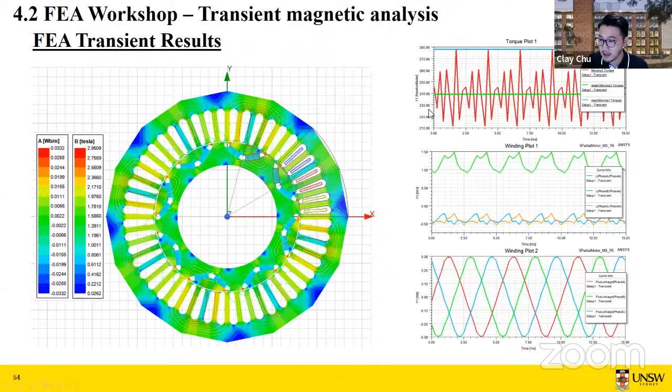Most importantly, we built this complete FEA model of the Prius motor, and we got its Ld, Lq, and flux linkage, right? And from yesterday's tutorial, we learned that in Simulink, the motor model is actually just the equivalent circuit, the torque equation, and the motor motion equations. So if you want to do drive of a PMSM, you need to at least know its pole pairs, the magnet flux linkage, Ld, Lq. And we also need to know its inertia, the damping ratio, and the friction.

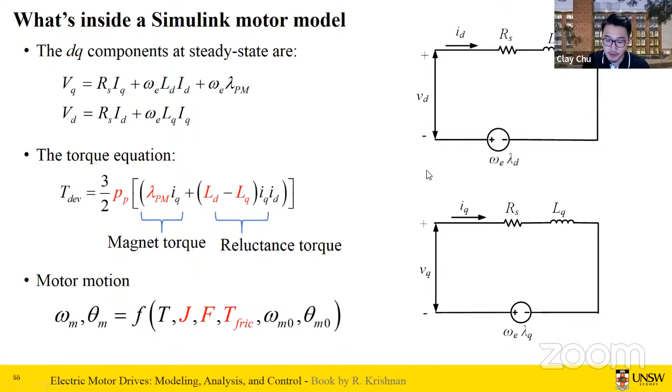If you have a prototype, a real machine, you can definitely measure these values. But in reality, most of the time when you just start to design an electric machine, you don't have the prototype. We only have the FEA model. So you can build the FEA model, get these fundamental parameters, and then work on the drive. So your project can go in parallel: one team works on the motor design, another team works on the motor drive. This is the advantage of using FEA in motor drive and motor design.

In yesterday's tutorial and lecture, we learned the FOC drive, how to implement field-oriented control on an IPMSM. So this is the control block diagram. In such a control, we want to control the speed of a particular IPMSM. So we give it a speed reference, and from the encoder we know the real-time speed of the machine. Then we get the speed error and process it with the speed PI controller. The output can be either torque reference or Iq reference.

Then based on the output of the speed controller and the real-time speed, we need to decide which control trajectory we want to follow: MTPA, maximum torque per ampere, flux weakening, or maximum torque per volt. So how do we know which trajectory to select? Professor Datta introduced this in her lecture. We need to calculate the base speed, the crossover speed, and the critical speed of that machine. The equations were provided in the lecture.

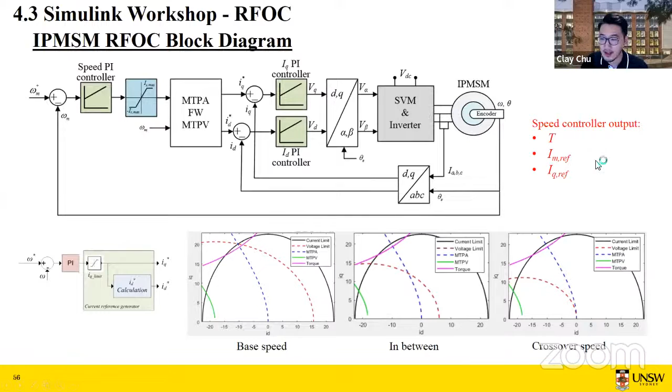In our inverter, we have 6 switches. We need to use SVPWM to generate the duty cycle for each switch. And this part of knowledge is also covered in Professor Datta's lecture. All right. So this is a brief review of the FOC control.

Another knowledge point I want to emphasize to you is that when we see FOC control, we are actually referring to this part of the control from ID and IQ. So this is the FOC control, meaning we are using ID and IQ to control the field, the torque, and the speed of the machine. The first part is the speed controller. No matter what control method you're using, you need the speed controller, okay?

So see, for this one, Professor Datta introduced the direct torque control. For this one, we also need the speed controller. After that, we use the torque and the flux to control the machine and the inverter to generate the duty cycle, the gate signal of each of the switches in the inverter. So this is DTFC control.

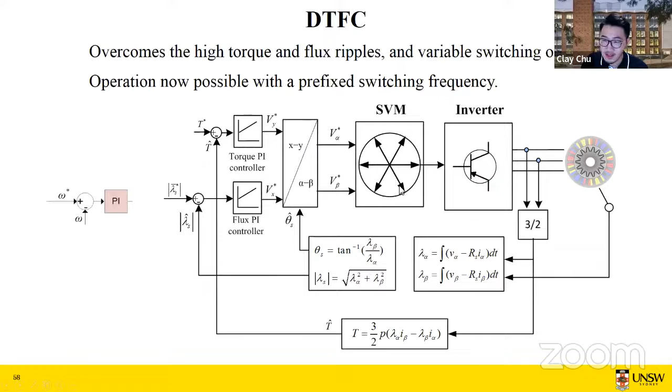All right. Now, let's go to the Simulink model. I have uploaded this model to the shared Google Drive, so you may download it to your own computer and explore. I hope you have tried using this model. This is the most basic and fundamental, and you can say the most classical FOC control. I did my best to make it look neat, and you can see all the parameters are properly named, so you can know what's inside each of these blocks.

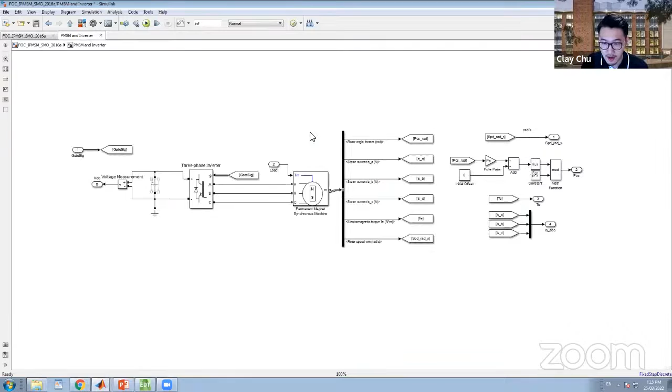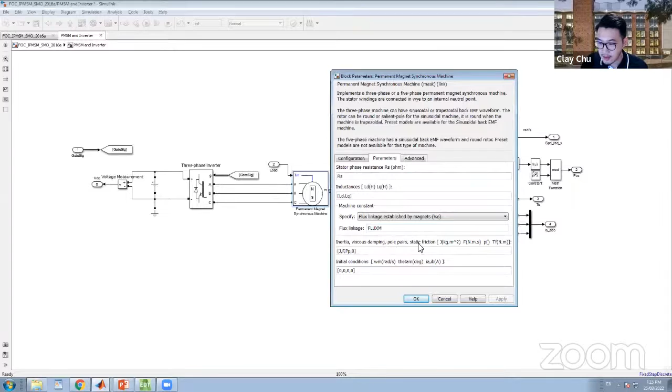Yesterday we introduced how we construct the hardware part. We have this 3-phase inverter, we have this PMSM, and inside it is actually the DQ equivalent circuit, the torque equation, and the motion equations. To build this, you need LD, LQ, RS, flux linkage, and the mechanical parameters. The input of this block is just the gate signal, the duty cycles. The output is 3-phase current, DC voltage, and encoder position.

We don't always know the torque of the machine, but we can estimate it using the parameters and IA, IB, IC. After IA, IB, IC, we need to transform them to ID and IQ. And a very important part is to decouple ID and IQ. So why do we need to do the decoupling? Do you still remember? This is also provided in Professor Datta's lecture. We want to decouple IQ in VD and ID in VQ to make the current controller faster.

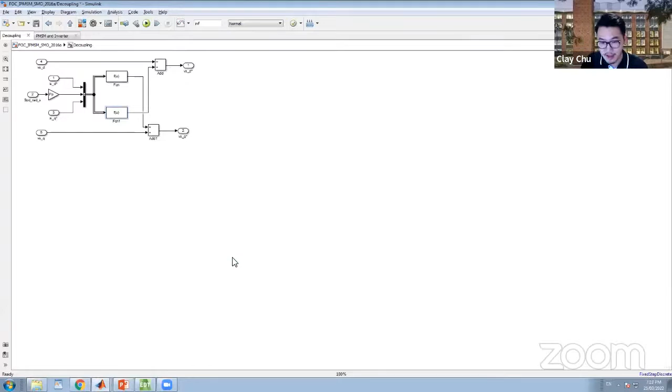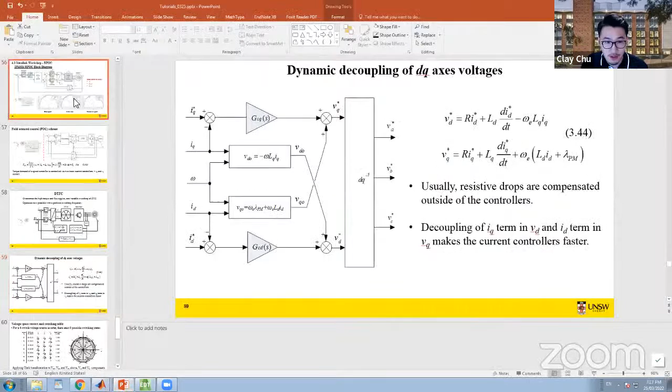So this is the diagram and the equation. If you open our Simulink model, you will see the same equations. This is built exactly as the block diagram and the equation indicate. After we do the decoupling, we have VSD and VSQ to be used in the control. So let's talk a little bit about the control. You can compare the Simulink control model with our control diagram shown here. Again, they are the same.

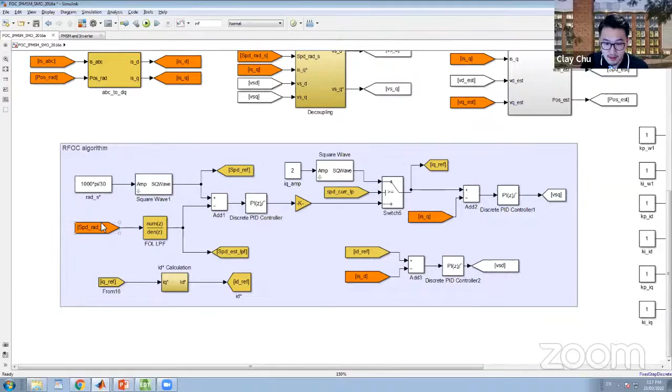At the beginning, we have our reference speed. For example, in this case, we want the machine to operate at 1000 RPM. And this is the speed measured from the electric machine. We get the speed error, and it passes through the first PI controller, which is the speed controller. The output of this PI controller can be either torque or IM or IQ. In this case, we are using the speed controller to generate the IQ reference.

Then using the IQ reference, and in this model, we assume the machine only operates in the MTPA region, okay? So this is where you use the equation for MTPA to calculate the ID reference. So this is how we get the ID reference, okay?

And after we get the ID and IQ references, we need to apply them in the next two current PI controllers, so this one and this one. And then we can get our VSD and VSQ. So actually the decoupling should be after the control. So we get VSD and VSQ, we do the decoupling, and we get the decoupled VSD and VSQ, okay?

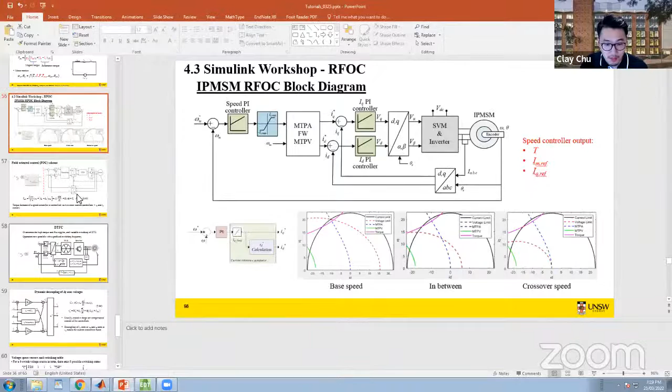And after we get the VSD, VSQ, we go to the SVPWM generator. I hope you still remember what's inside the SVPWM generator. So for an inverter with 6 switches, we can have 8 combinations, and then we can draw them in this vector plot. So a full circle, 360 degrees, means 1 full electric period. So we need to operate the 6 switches to generate a circle.

Because a circle in the alpha beta reference frame is a sinusoidal wave in the time frame, which is the voltage varying with the time. And based on the theta angle in the alpha beta reference frame, we can decide which sector the motor is currently operating in, and in each sector, which switches we need to control, okay?

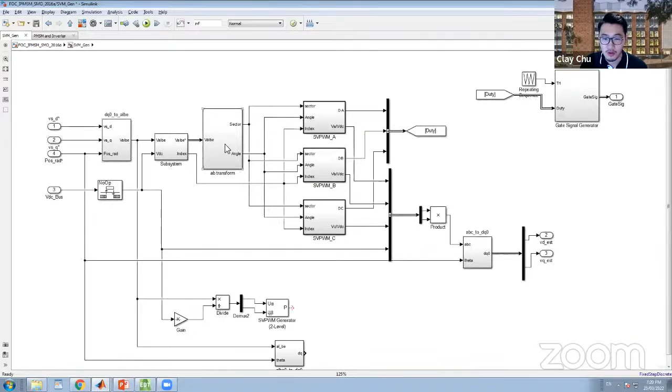And if you go to this block, you will see the same thing. So we get VSD and VSQ, and we do the alpha beta transformation to get V alpha, V beta, and then from that, we calculate the vector number and the angle. Then using the vector number and the angle, we decide which switch we need to turn on, which switch we need to turn off, and what is the duty cycle. There is a matrix for you to calculate the duty cycle for each switch for each different sector and vector angle.

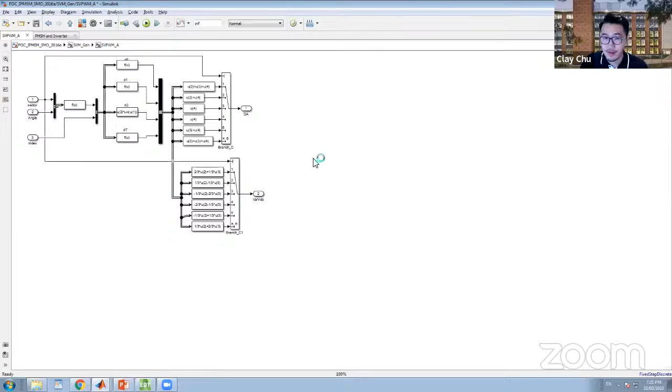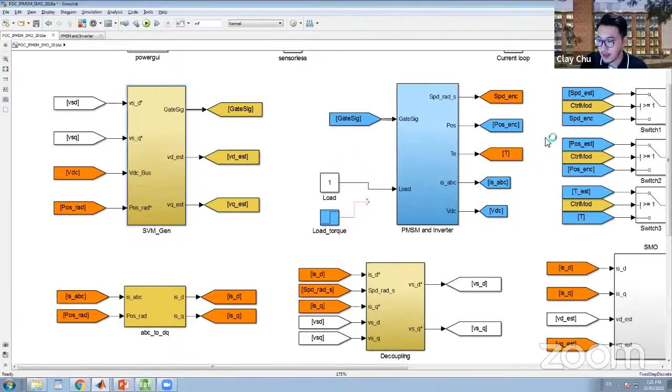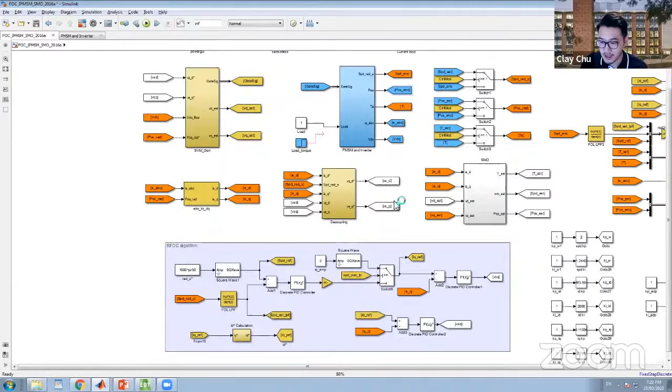Okay, so this is how we build the SVPWM generator, and the output will be duty cycles, duty cycle for each switch. And the duty cycle for each switch will just go directly to the inverter, and that controls the PMSM. And in the next control cycle, we will get the new IA, IB, IC, VDC, and rotor position. And we just repeat this control cycle, and then we can complete the FOC control. Okay, now let's look at the result.

Compiling, open the diagram. Okay, so we are controlling the machine to accelerate from 0 to 1000 RPM. So you can see this is how ID follows the ID reference. How ID follows the ID reference is controlled by the ID PI controller. And this is controlled by the IQ PI controller.

Okay, this is the speed. The orange one is the speed reference. The blue one is the encoder measured motor speed. The yellow one is actually the speed estimated by the sliding mode observer. We won't talk about the SMO, but it is built inside this model for you to explore.

Okay, and Professor Dutta has covered SMO, but at the basic level. So this part of knowledge is for you to explore in your own time. And if you have any question, you can send me an email. We can discuss it.

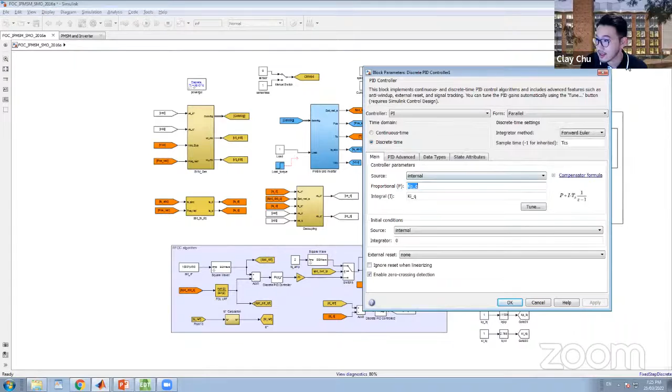But before I go to that, do you have any question about the Simulink model? Has anyone tried using it? Do you have any question about it? Nope. Okay, that's all right.

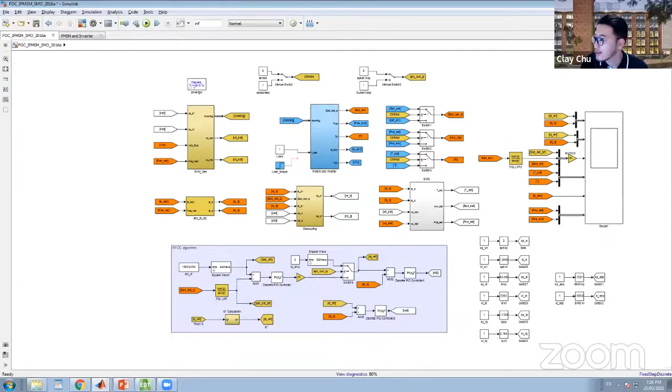Now let's see how we should tune the PI controllers. Oh, sorry. So the most widely used and classic method to tune a PI controller is called the pole placement method. I won't go too deep into the theory, the control theory, the transfer function, the plant model of the pole placement method, because we are engineers, so you don't have to understand it. It is good if you can understand it, but the most important thing is you need to know how to use it. So in this tutorial, I will only briefly introduce the theory, and most importantly how we should use this pole placement method to calculate KP and KI.

In this case, we are using the ID and IQ controller as an example. So first let's see the theory of pole placement. Basically, for every control system, you need to know its transfer function. You can also call it the plant model. And because we are trying to build this model in Simulink, and Simulink is discrete, we need to discretize the plant model, right? So after we build the transfer function, we discretize the plant model.

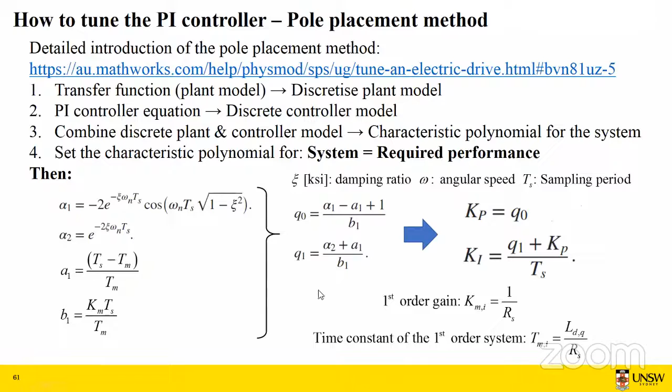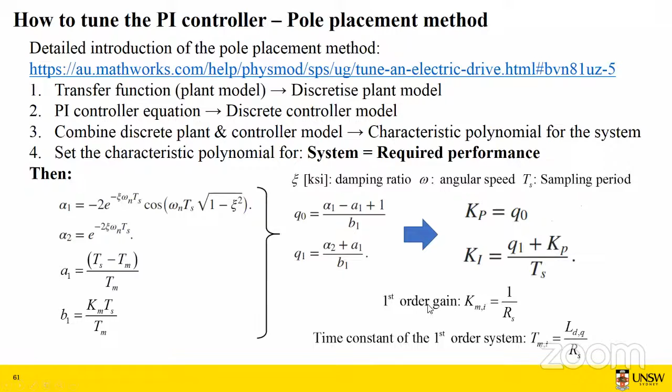In the Google Drive I shared with you, in the MATLAB file, you will find the MATLAB code applying these equations to calculate KP and KI for the ID and IQ controller of the Prius IPMSM motor. They are exactly the same. I can probably show you the code.

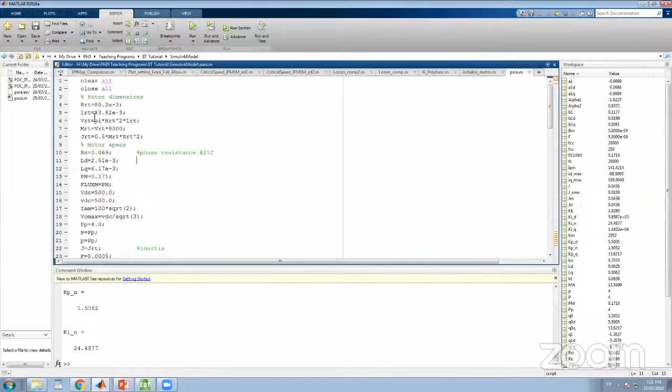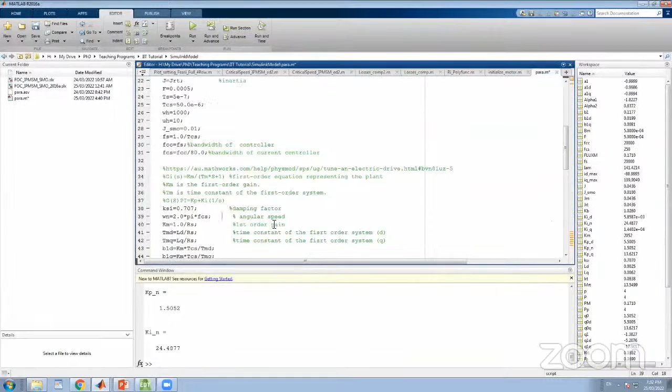So if you can see this, it's probably a bit small. Okay. So it starts from here. This ksi is the damping ratio. Omega n is the electric angular speed. Actually, I should not say it's electric angular speed, because it is 2 pi f. F is the bandwidth of the current controller. Okay, it is actually the control frequency.

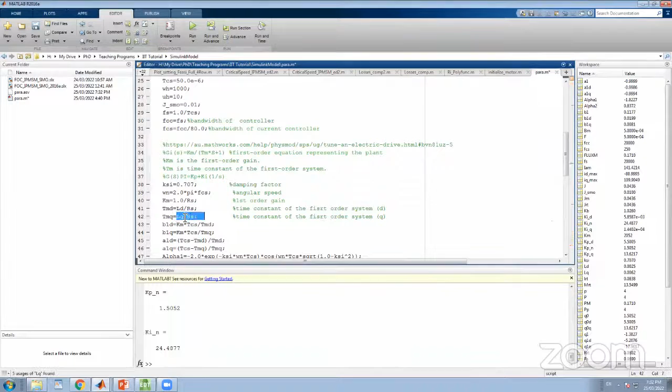Then Km is our first order gain. Tm is the time constant of the first order system. For the ID controller, it is LD divided by RS. For the IQ controller, it is LQ divided by RS. And these are the equations to calculate B1 and A1, alpha 1, alpha 2, Q0, Q1. And this is the equation to get the KP coefficient and KI coefficient: the value of KP and KI for the ID controller, and the value of KP and KI for the IQ controller.

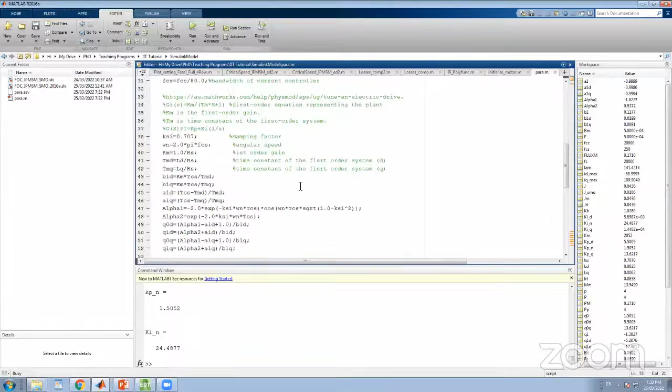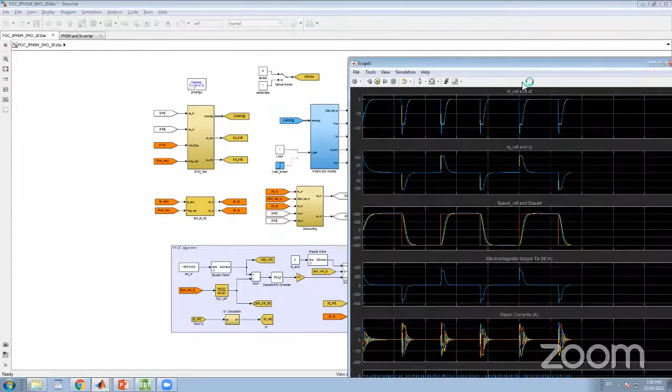And if you see here, the KID and KPD, which is the KP and KI for the ID controller, made the ID follow the ID reference very well, right? And also we have IQ following the IQ reference very well. So this is how you use the pole placement method to calculate the KP and KI to be applied in your current controllers.

Okay, so up to here, do you have any questions about this? This is the very classic method to tune the PI controller. Classic, but useful. No? Okay.

We don't have any questions, so let's try using this model and try changing the load condition, and let's see how the motor will respond to a load change. So in this case, let's give the motor a constant speed reference and let's run the model.

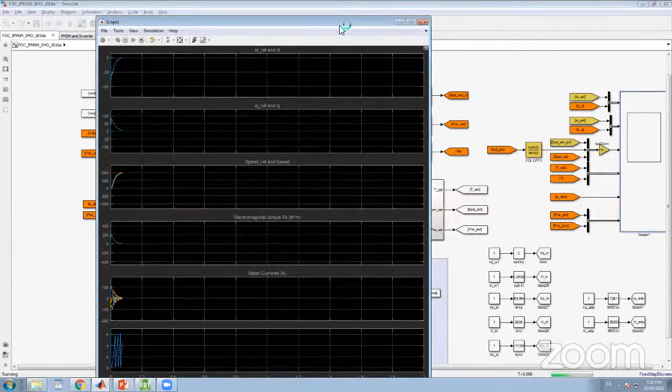Okay, so you can see now ID is following the ID reference, IQ is following the IQ reference, speed increasing from 0 to 1000. And when it reaches the designated speed, our torque will gradually drop to very close to 0. So this is the place where we change the load we apply to the PMSM model.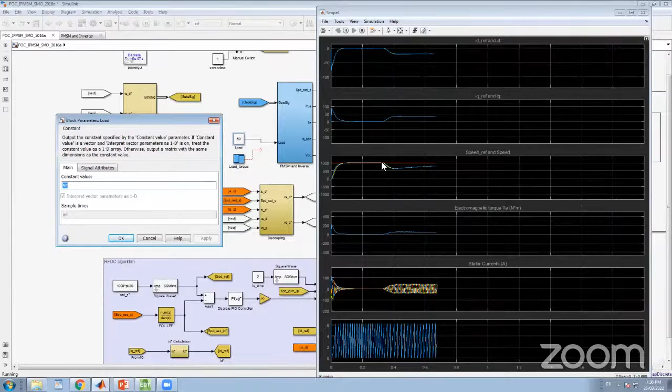So after we apply an additional load, you can see the speed dropped, because we applied an additional load. And now the controller is trying to get a higher current amplitude to increase the torque to compensate for the mechanical load we added to the machine. So there will be a sudden speed drop and then the speed will gradually go up to the reference value.

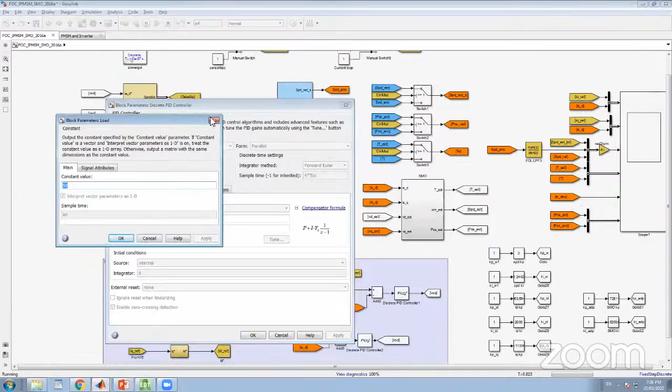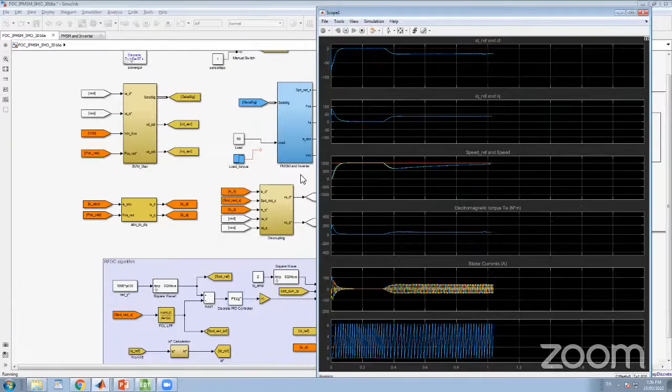If you think it is increasing too slowly, then you need to tune the speed controller. Oh, not here. So we can increase KP and KI to make the machine go back to the steady state faster. Okay. Now let's try increasing the load again.

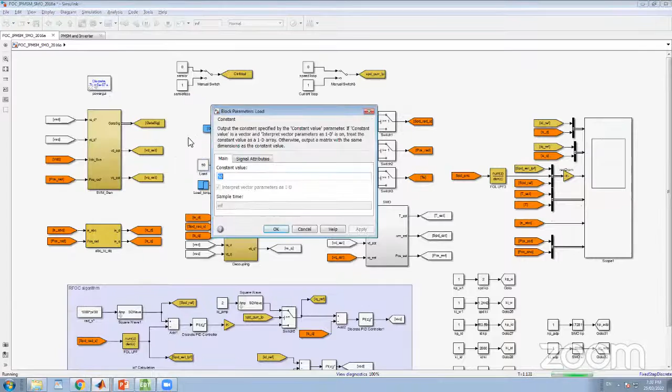So after we further increase the load, the current also increases. The speed drops again, and then the controller is trying to get a higher current, higher torque, to accelerate the machine back to the speed reference.

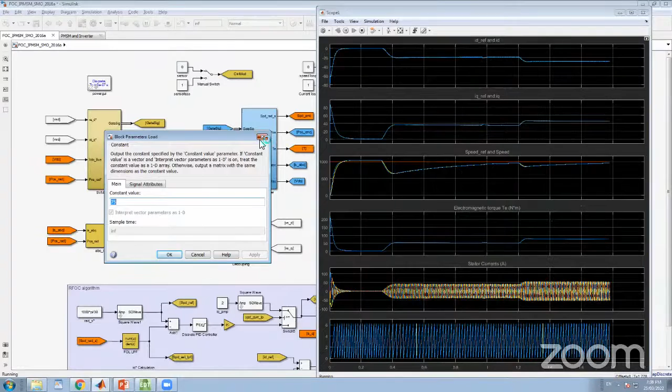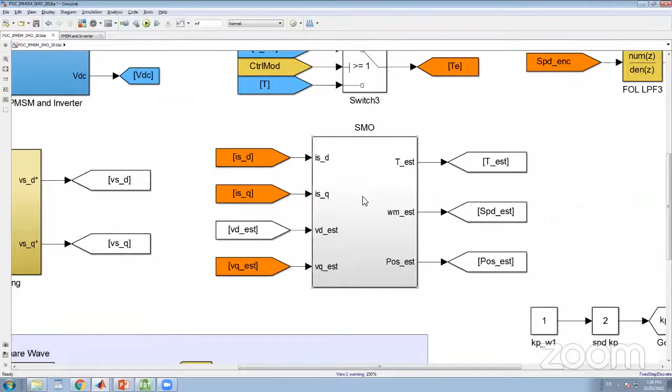Like I said, this model is also built with the sliding mode observer. This is the sensorless position estimation algorithm. Professor Dutta has covered the basic knowledge about SMO. You can explore this block later in your own time, and you can also switch to sensorless using SMO. Just click here, and it will switch to the SMO controller. So this is basically what's built inside this model.

And yeah, do you have any questions about the Simulink model using field-oriented control? Nope. Okay.

If there's no question about field-oriented control, then let's go to the last part, about optimization. So how should we do machine optimization using optimization algorithms? All right. So the two most commonly used multi-objective optimization algorithms are the particle swarm algorithm and the genetic algorithm. Professor Dutta has introduced both algorithms in her lecture, but let's go through them together with more technical details.

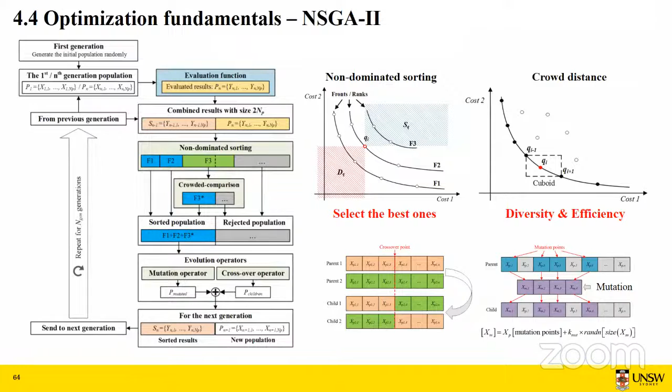From the Pareto front. So this is basically how the algorithm works, okay? Do you have any question about this part? Any question about the non-dominated sorting or the crowding distance? Or if you have any question about the previous step, please let me know. Do you have any question about the genetic algorithm? No?

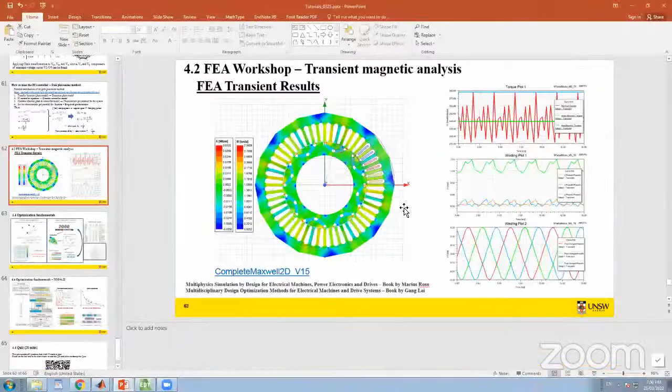Okay, then if you don't have questions about that, I want to show you a few other functions of the, oh, my Ansys is frozen. I can't open it. All right. Okay. Let me close it and reopen it to show you some results of FEA. Okay.

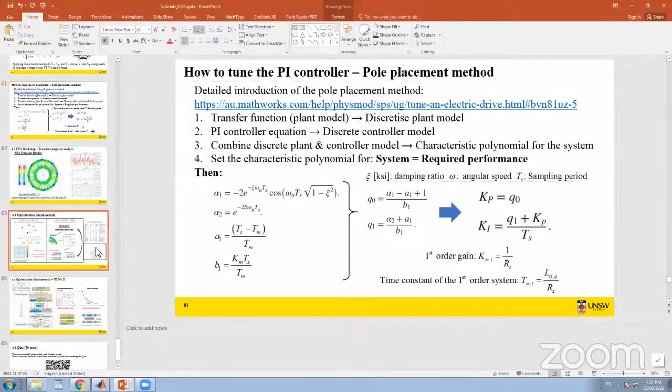Okay, so please give me a few minutes to solve the technical problem. In the meantime, if you have any question, you can organize your question and send it through the chat window, and I will help you to solve it. Any question about the pole placement method to tune the PI controller or the optimization algorithm, please let me know. Okay, so let me solve the technical problem. I'm sorry for that.

Okay, I got one question asking which type of method you have adopted for tuning the algorithm parameters. Okay, so which algorithm parameter are you referring to? Sorry, I can't hear you clearly. Do you want me to open the Simulink or the PowerPoint to answer your question? So is it a parameter in the Simulink model, or is it a parameter in the optimization algorithm?

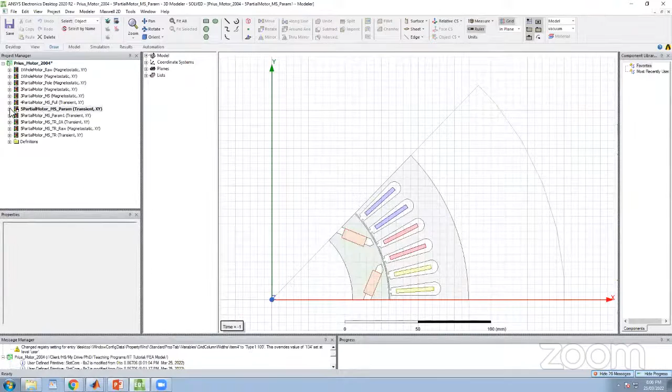Is there some issue? I tried to open it. I don't know. For other participants, are you able to open it? Shatish? Okay. It's saying it's not accepting the responses. So I think that is not activated. Please look into that. Okay, let me try to solve it. Yeah, please. Share. Now it's okay. Dr. Lei, it's fine now. Okay, yeah, that's good. Thank you.

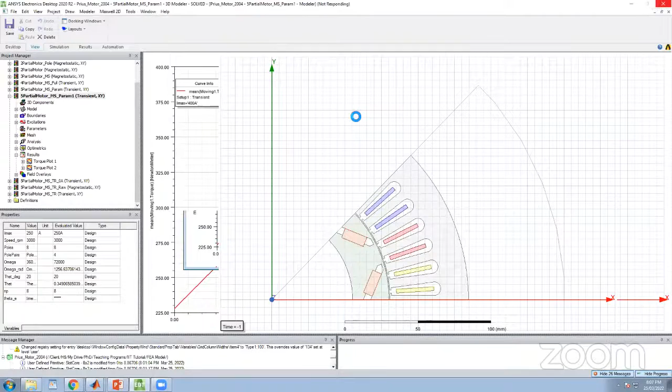Okay, now I finally got the software open, and sorry for that technical problem. The thing I want to show you is parametric analysis. How do we do a parametric analysis using ANSYS, or any other FE software? Previously we solved this transient model for a fixed theta angle. Theta angle is the angle between the current vector and the Q axis, right?

If you remember what we learned from the lecture, the MTPA, the theory of field-oriented control, is that we can use the current amplitude and also the current angle to control the magnet flux, the flux linkage, and also the torque. And for the IPMSM machine, let me draw it here. For the IPMSM machine, normally we have both the magnetic torque and also the reluctance torque.

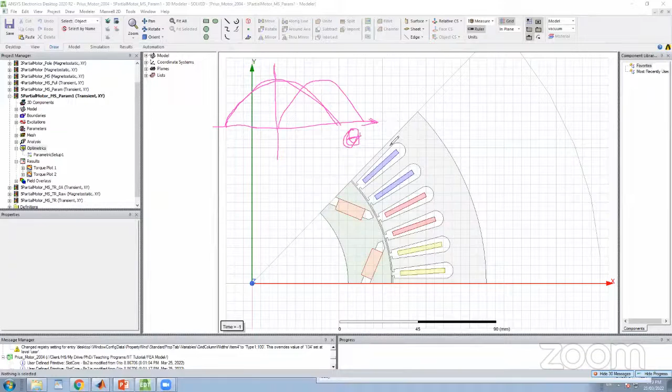The x-axis is the value of our theta angle. Or you can also represent it using the Greek letter gamma. So for the IPMSM machine, we don't always have the maximum torque when gamma equals 0 degrees, right? Sometimes we have a higher total torque. Let me change the color. If we sum the magnetic torque and the reluctance torque together, we get a new total torque curve like this.

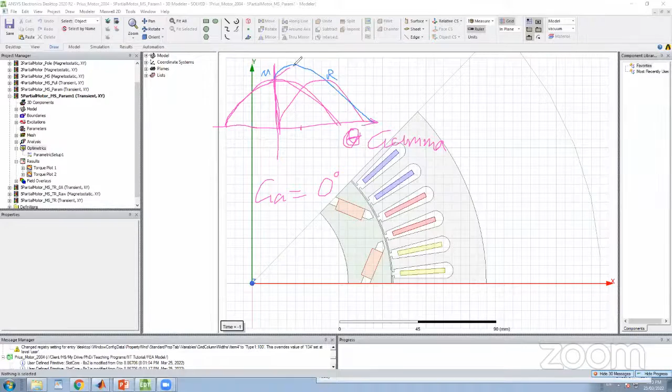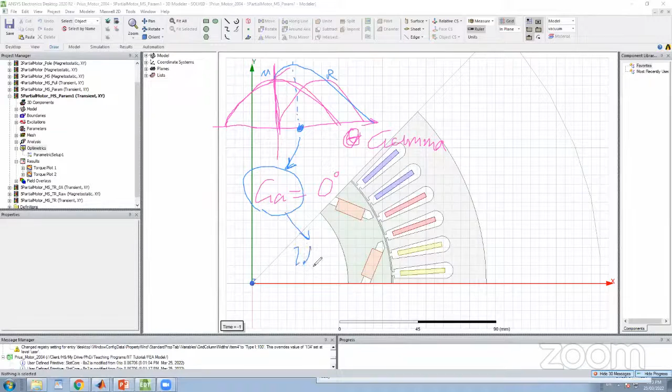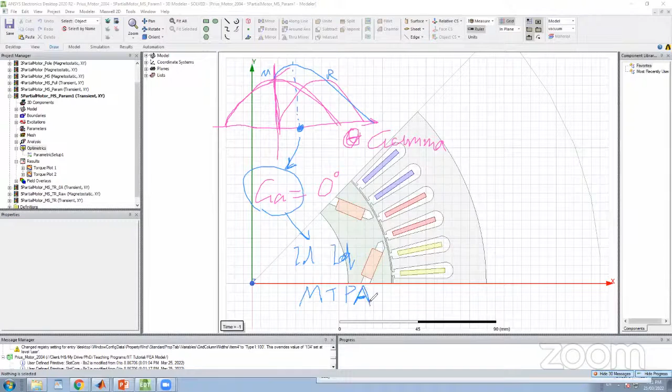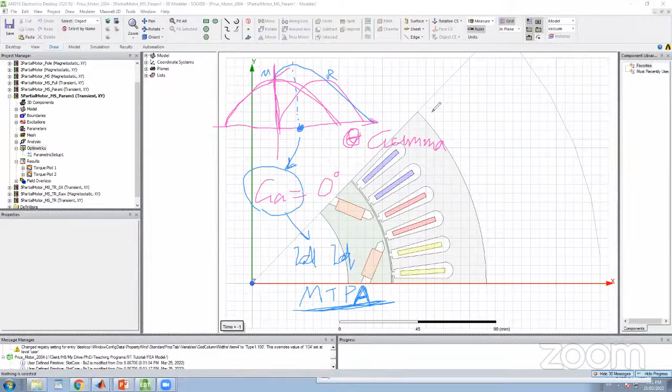You can get the maximum torque when your gamma angle equals a particular value. And the ID and IQ calculated using this gamma angle can provide you the maximum torque per ampere, right? So theoretically, this is the theory of MTPA control. We find the gamma to get the ID and IQ for the maximum torque per ampere operating condition. You can also find that maximum torque per ampere current angle using FEA. I'm going to show you how to do that.

First, I want to show you this. When we assign current excitations to the three-phase winding, this is the current equation, which is Imax times sine of omega times t plus theta. And this theta is that current angle. Sorry I'm using theta sometimes and gamma, but it's the same angle. So we want to find the theta angle that gives us the maximum torque per ampere operating condition. How do we do that?

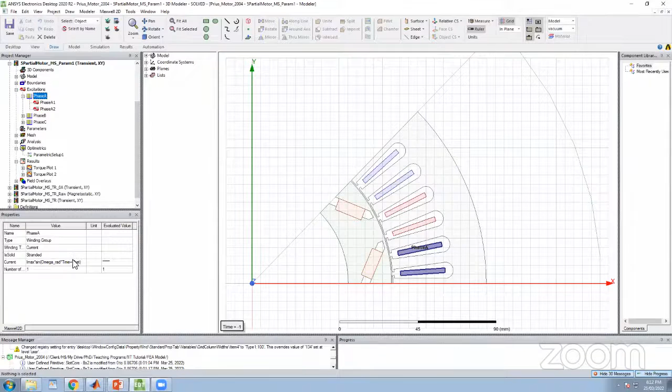We need to use the parametric analysis to set up a swept analysis. Just right click on Optimetrics, add parametric analysis. Sweep definition, click add, find theta. This is theta degree, meaning the value is in degrees. Linear steps. We want to try theta from 0 to, let's say, 60 degrees in steps of 5 degrees. Add it here, click OK. In the table you can see all the theta angles we want to try. It will solve the same model with different theta angles automatically. Click OK. So the basic settings are done.

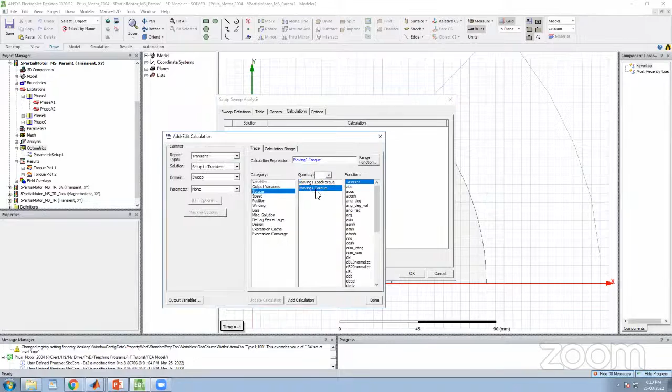You can also override the other parameters we defined for this model. For example, if you want to do the theta parametric analysis with a different current, check override and change the value to the one you want to try. You can also change the speed, or the pole number. You can also tell the software what other calculations you want, for example torque, losses, flux linkage or inductances, anything you need, and whether you want to see the field for each design point. After you set it, just right click on it and solve.

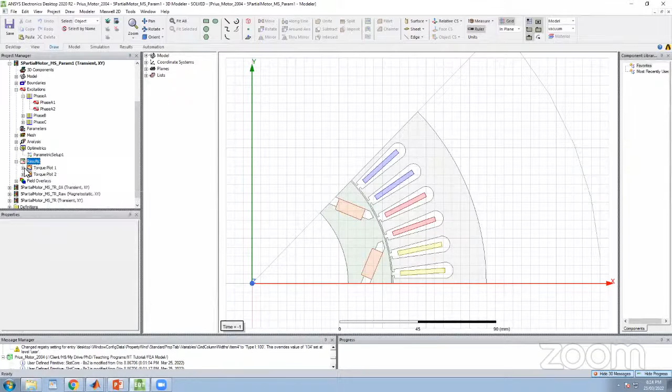So this is the torque analysis result. You can see we get multiple torque curves for different theta angles. But if you want to get the theta angle that gives the maximum torque per ampere, you need to calculate its average value.

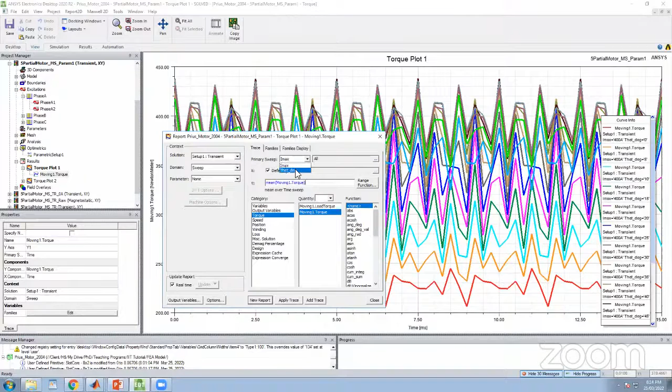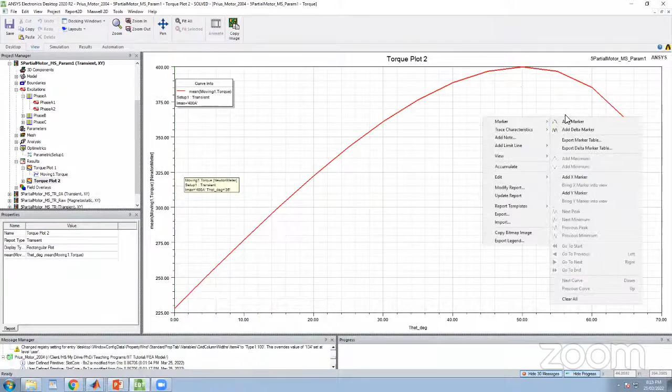Changing the y-axis data to average value, you change the x-axis to theta, click apply, you will get this plot. Okay, so this is the average torque value varying with theta. And you need to remember in this case, the current amplitude is constant. So we have a constant current amplitude. The only thing we are changing is the theta angle, which is the current vector angle.

Okay, so you can see when theta equals 50, we have the maximum torque that is very close to 400 Newton meter. So this is the maximum torque of the Prius machine claimed in their report, right? So you need to not just apply the maximum current, you also need to find the theta angle that can allow the machine to operate at the maximum torque per ampere condition to get the maximum torque. Okay, so this is how you can perform a parametric analysis.

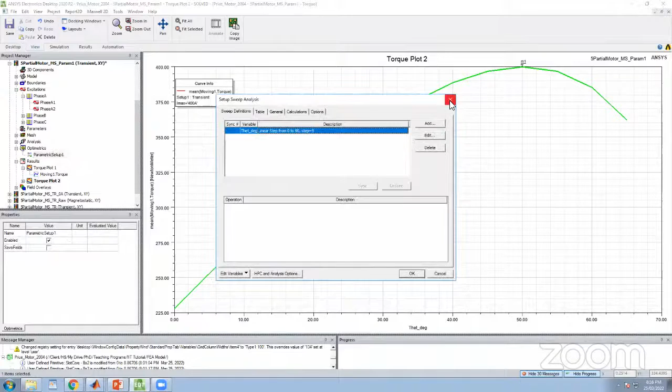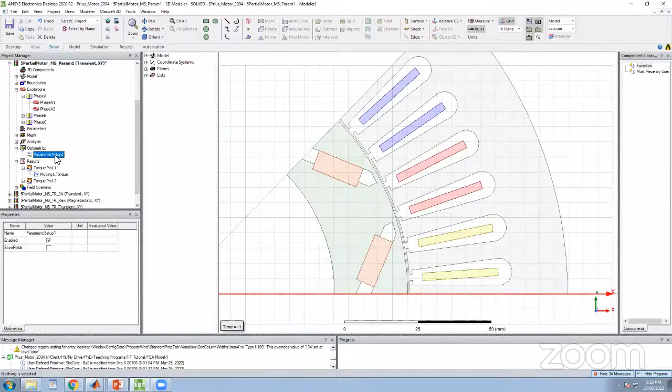In this case, I'm only showing you varying theta, but you can also do parametric analysis of other parameters, such as the air gap. If you still remember, we introduced how to estimate the air gap length, but that's only a theoretical analysis. That air gap may not give us the optimum performance. So you can create a variable representing the air gap and set a parametric analysis here, varying that air gap in a certain range, and you can know from your report which air gap gives you the optimum performance.

Okay. When you do parametric analysis, you can only do that for one or two or a few parameters. But when you do an optimization using an algorithm, you can actually use all design parameters as your DNA and then apply it in the optimization algorithm. Then eventually you will get the optimal design. Okay, so that's how the optimization works and how the FEA parametric analysis works.